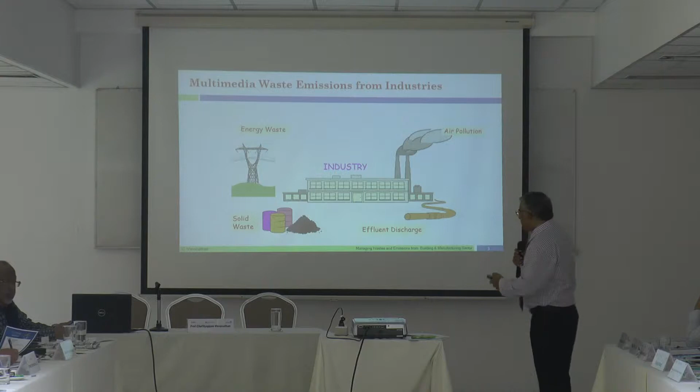And if you look at any industry, I'll start first from the industry sector. We have raw material input, and you have a production process, and at the end of this production process, we get a product. Okay? And you know the second law of thermodynamics, you cannot have 100% conversion, and in every production process there will be a waste. And the waste could be waste energy, or solid waste, effluent, or air pollution.

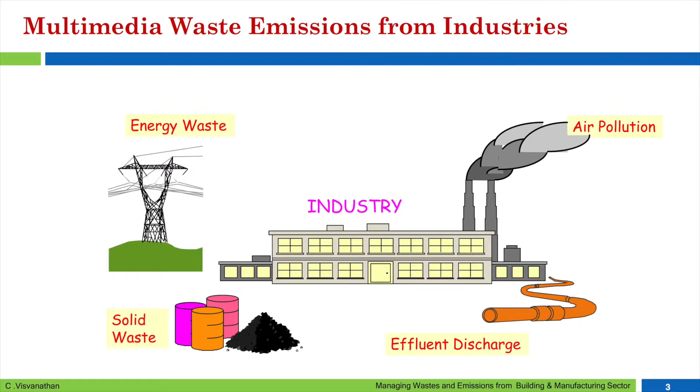Now the focus of my presentation is how we could reduce this multimedia type of waste, waste that comes in different media, at the production process. I will not focus on the energy part. I think Dr. Mohanty nicely covered it with a lot of examples, so I will focus on the other three parts. And the focus again is how we could do waste reduction, reuse and recycle.

To start with, let's talk a little bit about sustainable production. If you listened to this morning's first lecture by Dr. Modak, we talked about two issues, sustainable production and sustainable consumption. He gave a nice example of a washing machine. The consumption stage of a washing machine uses a large amount of resources.

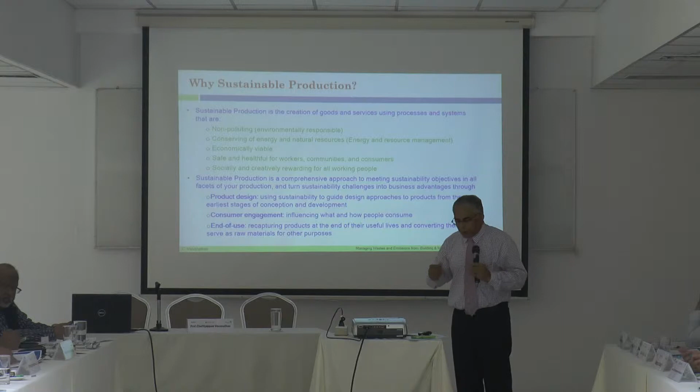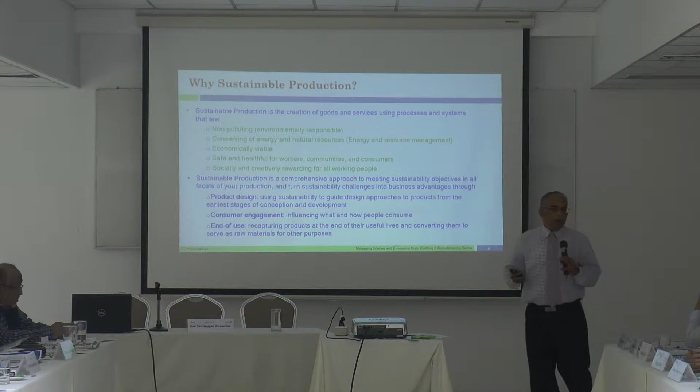And sustainable production is basically the creation of goods and services with a production process or system which is non-polluting, reducing water and energy consumption, economically viable, with a safe and healthy working environment. We talk about occupational health and safety issues, and it's also important that it is socially and creatively rewarding for all people.

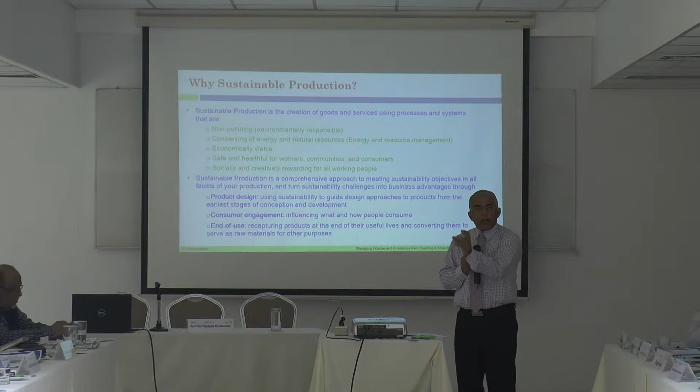That's what we want in sustainable production, and it can be done with two or three main issues. We also started with product design, with the first example of a toothbrush. I think that will be continued in the afternoon session by Dr. Modak, so I will not go into that. Consumer engagement is also important. Sustainable production and sustainable consumption are equally important. So that's why you need to educate people.

And that's why we said we are not going to give you bottled water here, because you need to believe in reducing the consumption. If you want bottled water, you need to keep on producing it. So sustainable production certainly goes with sustainable consumption. And at the end of the life cycle, what do you do after a product has finished its life cycle? With this, all three things come into sustainable production.

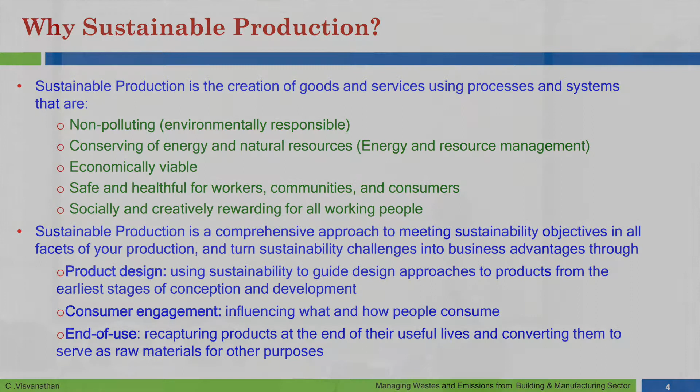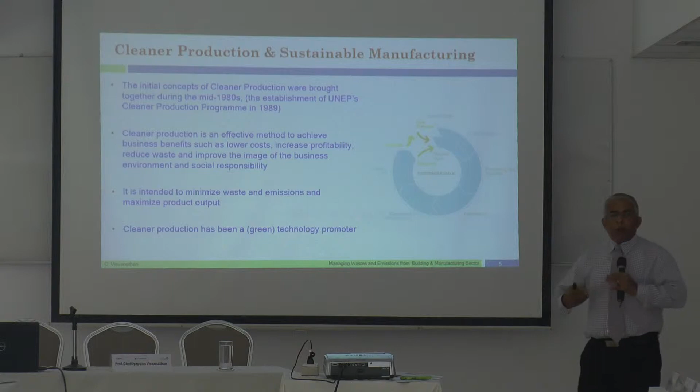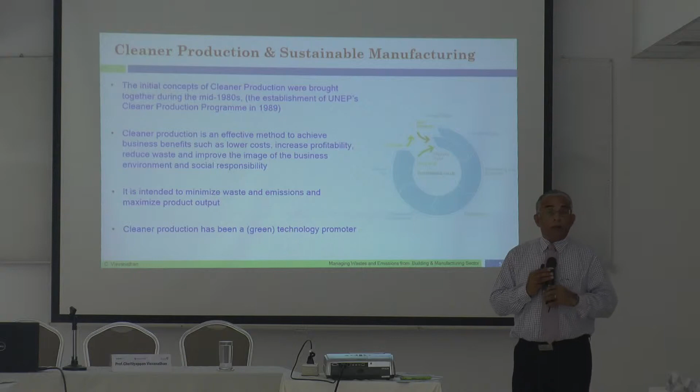In this context, you would have come across certain terminology. Cleaner production is a term originally coined by the United Nations Environment Programme in 1989, which talks about how you could make the production process cleaner, what today we are calling greener. And today the promotion of cleaner production is to a large extent driven by developing green technology. We talked about that example of going from 90 liters to 6 liters of water consumption. These involve technology.

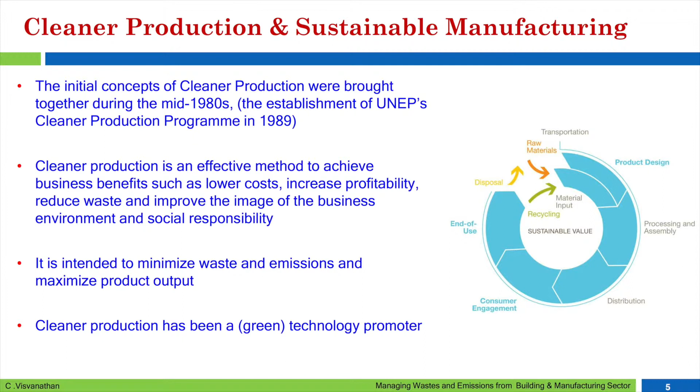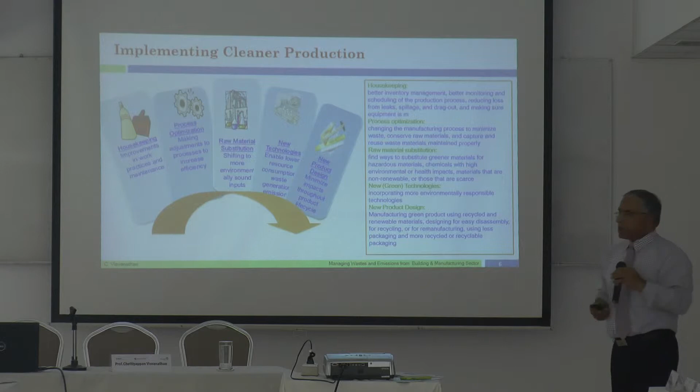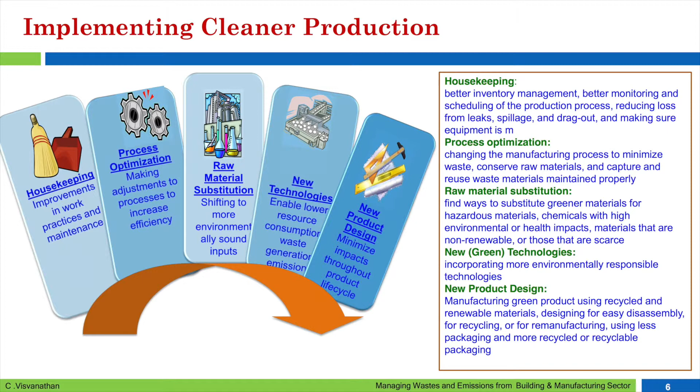But when you talk about cleaner production, please understand it also involves different stages, like how you run or maintain your industry, housekeeping. How do you optimize a particular process? Every process has an optimum condition which has the best efficiency. Raw material substitution, new technology and new product designs. I'll try to give you a few examples and snapshots of each in an industry so that you will understand.

But what is more important is that cleaner production or sustainable production doesn't depend only on technology. Although here we are emphasizing green technology, and that certainly helps us, you also have to look at other simple options, starting with how you use resources, how much water you consume, housekeeping, and recycling and reuse within the plant. Then you look at material substitution, equipment change, or changing the total technology, the greener technology, which from an engineering point of view comes as the last option.

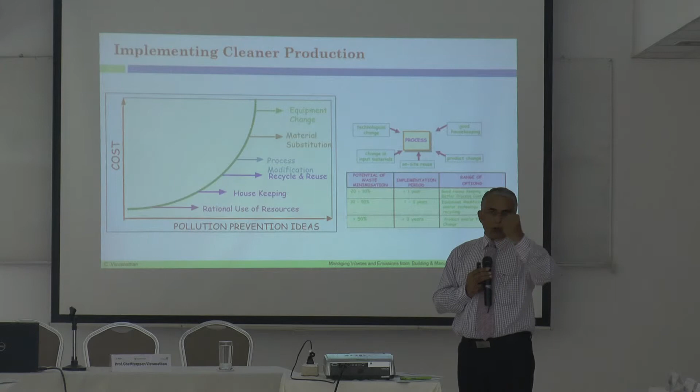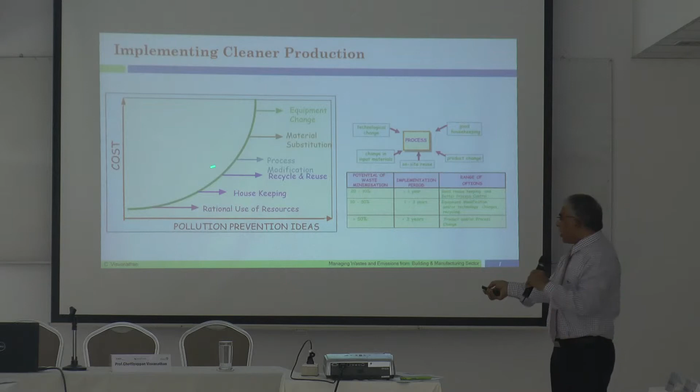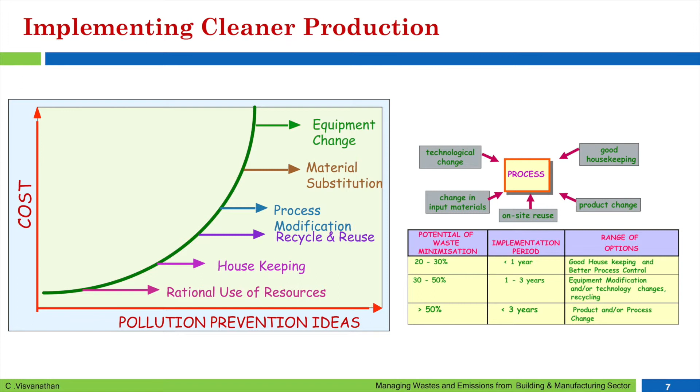But it's important that we have simple options which are to a large extent policy and management issues, and they play an important role. You cannot introduce a highly sophisticated technology before crossing the lower path. And these management practices, or policy issues, cost much less. So please understand, green technology, which is a technology-driven approach, also has a management approach. We need to look into that. I'll give you one or two examples of simple management options in many industries.

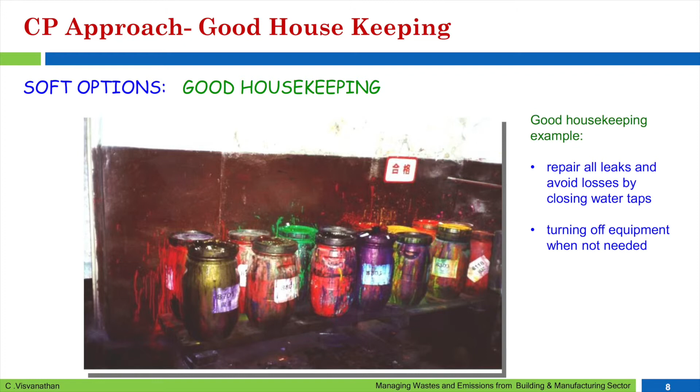Housekeeping is a very classic example. If you go to a textile industry, you can see how the dyes are kept. With spills of dyes, you're eventually losing resources, and at the same time, when the dyes are washed away, you are creating water pollution. It's very easy to manage this, rather than investing in highly sophisticated technology. So housekeeping plays a very important role, along with raw material storage facilities and how you maintain them, which is more of a management and operational issue.

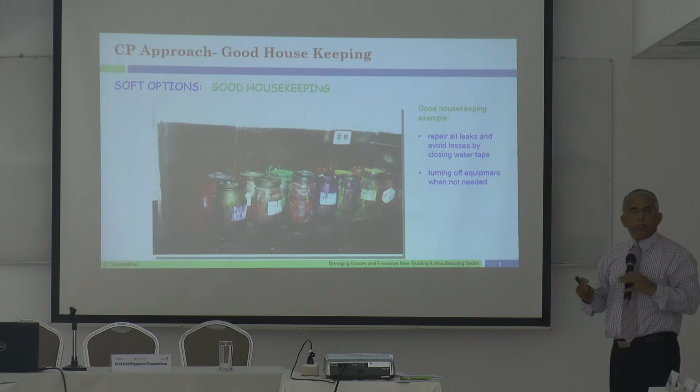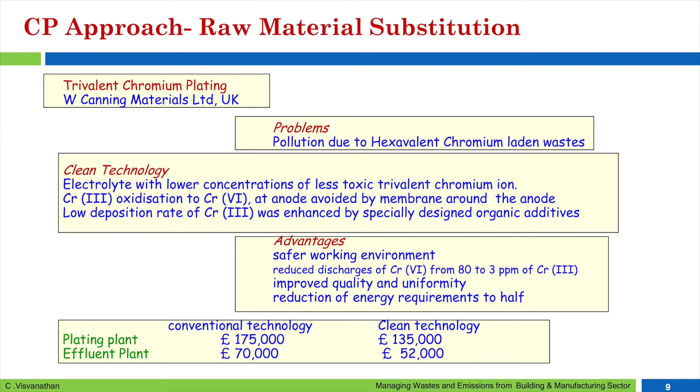And we can talk about raw material substitution. There are hundreds of examples. A nice example Dr. Mohanty gave this morning relates to the construction industry. We no longer like to use bentonite because it is considered somewhat hazardous, at least in the European Union. And there's a replacement material which produces a better product, might be slightly expensive, but if you look at overall efficiency and cost, substitution materials have become very important.

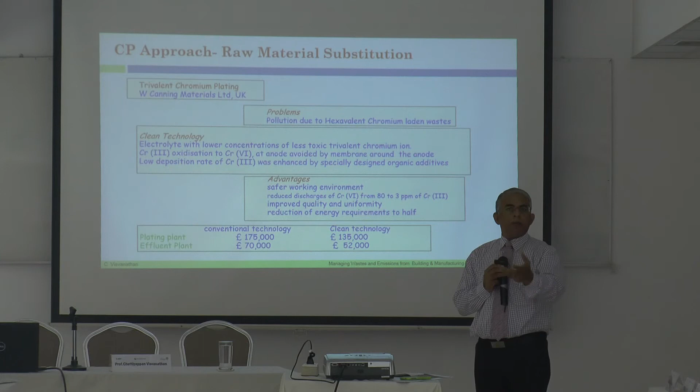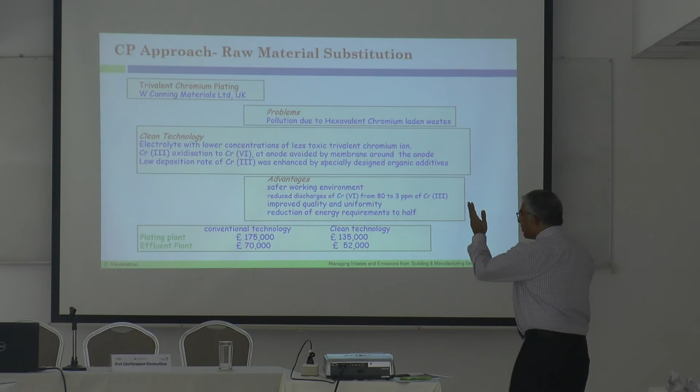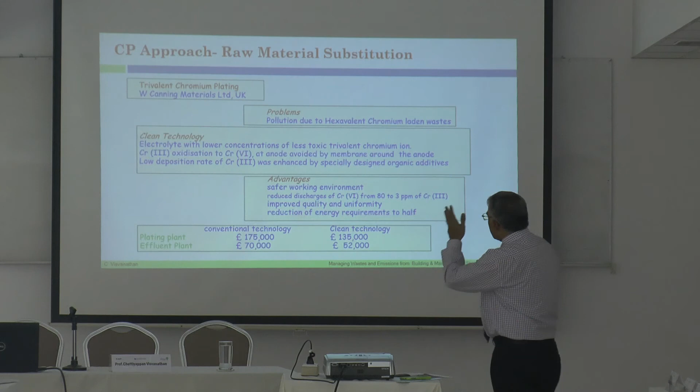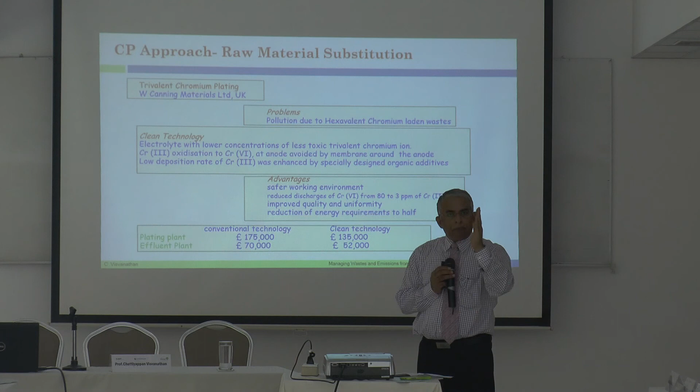In my example, I'm picking a very typical case of electroplating. When you do electroplating with chromium, usually we use hexavalent chromium, which gives a very good product, but extremely polluting wastewater that is very complex to treat. That can be replaced by trivalent chromium. It's a complicated technology, but it will produce almost the same final product with less pollution. So sometimes by changing the raw materials you can address the pollution issues, but please understand, even when you change the raw material, the final quality of the product has to remain the same.